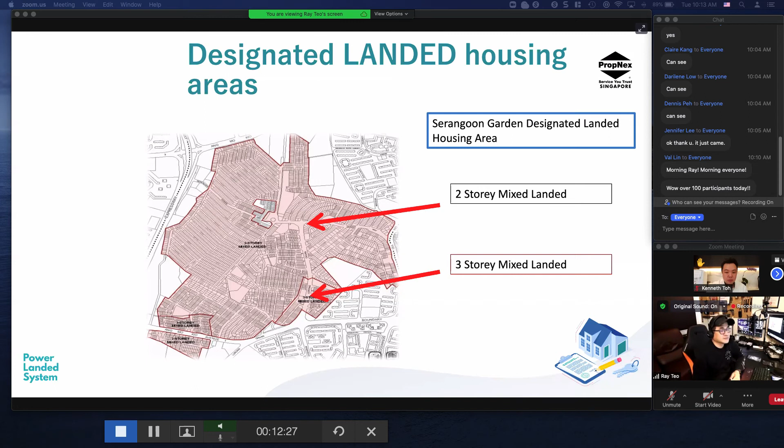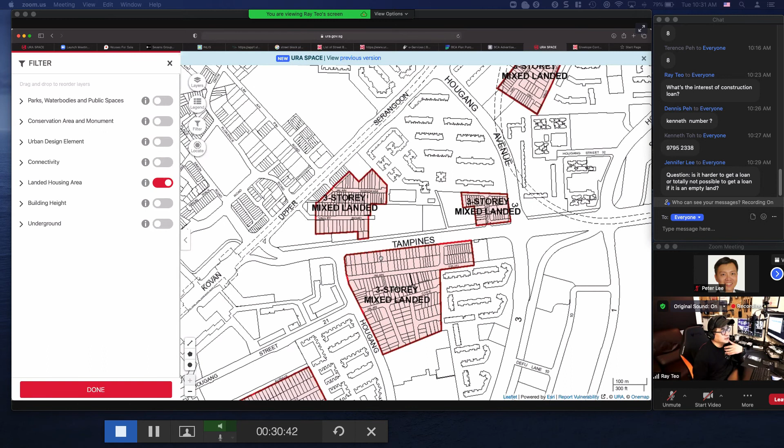In this area, you can build terraces. If you go further down in Serangoon, you'll find bungalow areas, 2-story bungalow areas. Where is this? This is the Lorong Chuan area, Dunsfold. In this area, only bungalows — only detached houses — can be built. But these are not good class bungalows.

These are bungalows, a landed housing area. This is how you use it - you need to do your due diligence to check so there's no misconception. Say your buyer buys land here, thinking it's a big land, good, I can subdivide into semi-D. You say, yeah, I checked already, can. But you never checked the landed housing area map, so your data is misrepresented.

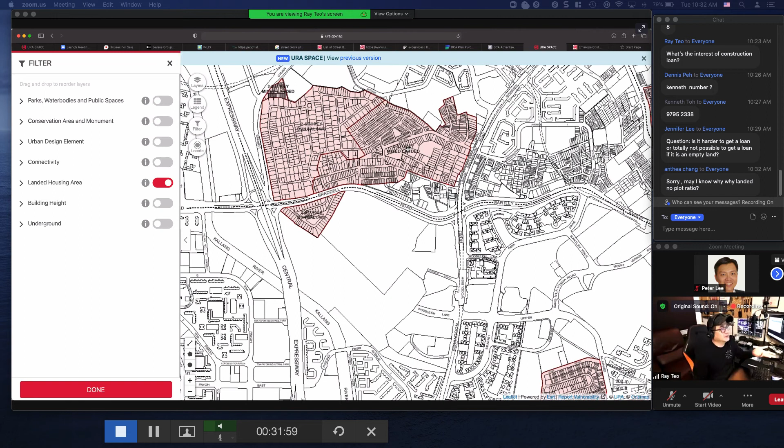May I know why landed has no plot ratio? No, landed housing area has no plot ratio, not landed itself. Landed housing area has no plot ratio because you are not supposed to build apartments. The maximum story you can build is 3-story. For example, here is 2-story only, but the highest you can build in the landed housing area is 3-story. So you cannot build anything above 3-story, no apartments, etc. Therefore, you don't need to put plot ratio.

So if you go down to Telok Kurau, you see Telok Kurau, or Still Road, or Jalan Telok Kurau, Lorong Telok Kurau, Lorong J, Joo Chiat Place - these are all landed. But these are slowly disappearing because this is not a landed housing area. So people are buying the landed here and amalgamating, that means combining the land together to become bigger land to build apartments. So down here you have plot ratio, but down here you don't.

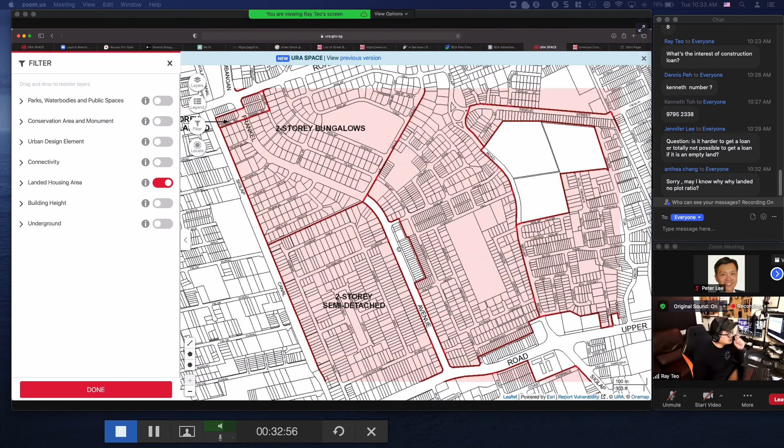So this is the number one thing you really need to check. Okay, so back to the slides.

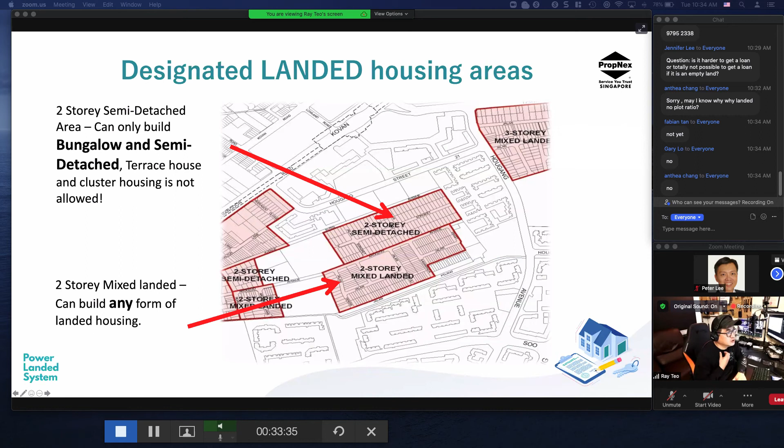Okay, so GCBA areas can also be found inside the landed housing area map. Can you see it now? Type 1 if you can see. Thanks Fabian. So GCB areas can also be found inside the landed housing area map - you can only build GCB there. The minimum land size for subdivision is 1,400 square meters.

People always ask me questions like, does it really mean that a bungalow less than 1,400 square meters but located inside GCBA is not a GCB? The key thing about the definition of GCB, when the government draws out a GCB area, their mentality is this: now you need to follow my subdivision requirement. If you want to subdivide a big land, a huge chunk of land, into smaller units, then every single unit's minimum size must be 1,400 square meters.

How about small land, like this very small land that's already only about 10,000 square feet, but it's already inside GCBA? These are still good class bungalows, just smaller good class bungalows. When we say good class bungalow area, it's actually a development control. Slowly it became a classification to buyers, but mainly when the government draws up a GCBA it's for development control, not as a classification of properties. This is why sometimes you see small landed plots, 10,000 square feet, located inside GCBA.

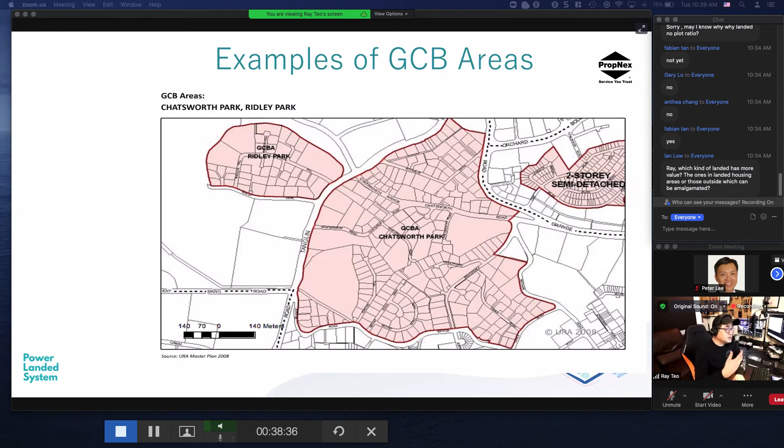There's no real much difference in terms of landed price per square foot in a landed housing area versus a non-landed housing area, if it's nearby. Or if it's a different district, what constitutes the difference in prices is based on location, convenience, and other amenities factors.

So converting, these are the basics of how to convert a postal code number to your postal district. This is because postal districts do have their advantage. Some districts command a higher premium than others. Definitely District 15 will usually command a premium as compared to 16 or 14.

But 14 and 15 depend on the exact location of the unit, so there's a small difference. You also have to take into consideration the Kembangan area in District 14 - most of the landed there is inside Kembangan area instead of Geylang area, because 14 stretches from Geylang all the way to Kembangan. So some of the Lengkong 2, Lengkong 3 landed properties, the price is quite similar to Still Road landed.

Various types of landed properties - good class bungalow, detached, these are all basics. I'm going to go through this very, very fast for you, but although they are basic, you need to remember their development parameters.

So a good class bungalow looks like this, located inside a good class bungalow area, with a minimum land size of 1,400 square meters. This minimum land size is for subdivision purposes - if your land size is 3,000 square meters, the maximum you can divide into is 2 units only, because of the 1,400 square meter minimum.

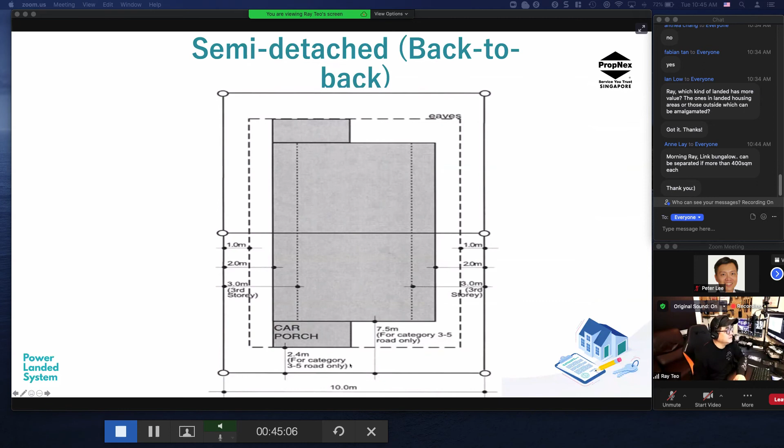When we want to look at land potential - if I have a very big bungalow land inside a semi-D landed area, I can subdivide it into semi-D. But I need to make sure first that the land must be 400 square meters, so I can subdivide into a pair of semi-D, 200 square meters each. On top of that, I need to look at the plot width - the old bungalow land together must have 16 meter plot width, then I can subdivide into a pair of semi-D with 8 meter plot width each. The minimum plot width is 8 meters.

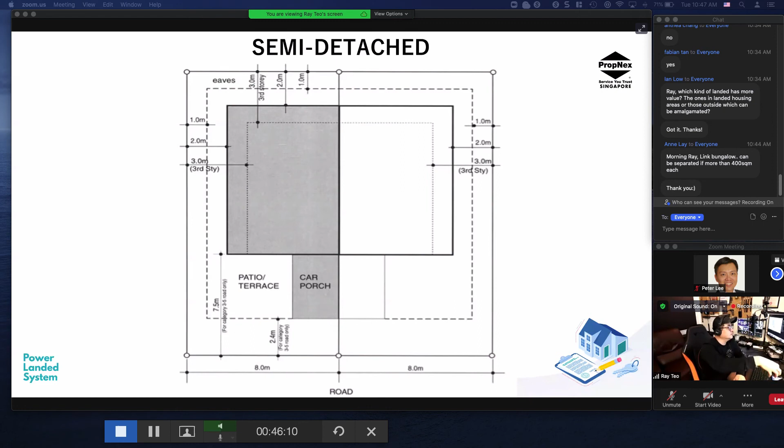Sometimes, if your bungalow's plot width is only 13.5 meters, even though the size qualifies, because the plot width does not qualify, you cannot do subdivision. That bungalow will always remain as a bungalow - cannot subdivide anymore.

So these are some of the issues. Recently we sold a very, very old bungalow land, like East Coast Terrace, to the 7 Group - very, very smart. Eric Ching is the boss, very smart. He managed to apply for subdivision into 2 pairs of semi-D, that means 4 units, plus 1 detached house, from one huge bungalow at 21,000 square feet.

So based on the price, he bought at 18.7 million, right? So the land cost will only cost him about $900 per square foot.

East Coast Terrace is next to Siglap, quite near to Siglap Centre. So there is prime land in East Coast, super prime land in East Coast. I expect the relaunch price per unit to be at least $2,500 per square foot, or even reaching $2,800 per square foot.

When you talk about per square foot in landed, we always talk about per square foot land. Nobody talks about per square foot built-in. People who talk about per square foot built-in are trying to bullshit. But does built-in make it more costly? Usually with bigger built-in, we will always see a more expensive per square foot land.

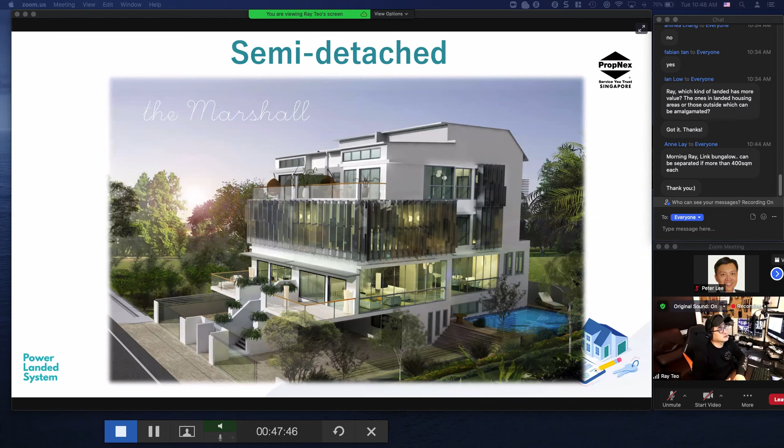Terraces, as long as more than 2 units are attached together, is called a terrace. So 3 units is a terrace, 4 units is a terrace, 5 units is a terrace. Everyone wants to build terrace, why? Terrace earns more money, because you have more built-in, especially inter-terrace.

This corner terrace, the requirement is exactly the same as a semi-D. Corner terrace type 1 is exactly the same as a semi-D. Do take note of this.

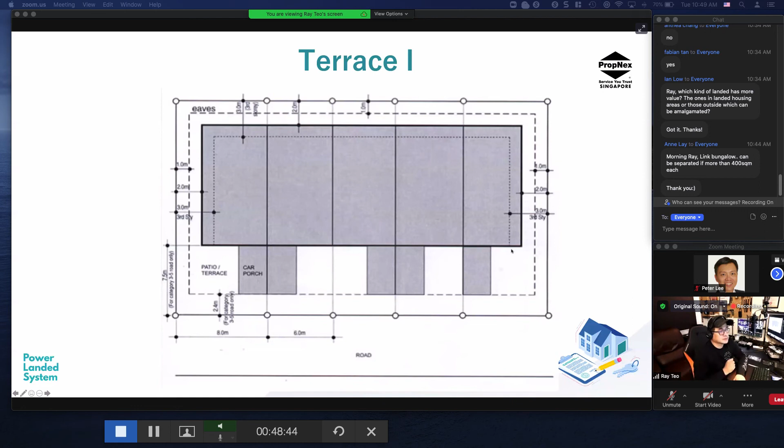This is terrace type 2. This is going extinct, all this type of property is going extinct. I see no car porch. The setback requirement from the boundary line to the building is only 2 meters. It's only type 2. Type 2 terraces nowadays very seldom get granted building permission, very, very, very seldom. For one of the requirements, it must form its own enclave for development to be granted type 2.

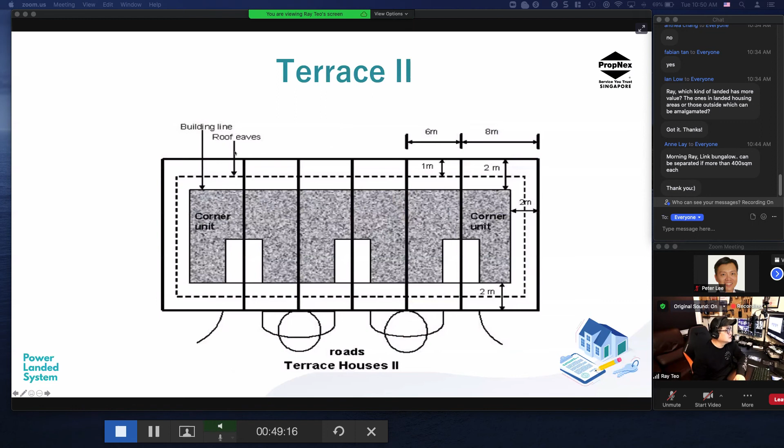Terrace. So this one we'll briefly go through, not important, seldom happens, won't happen anymore. So strata landed: townhouses, cluster houses.

I think I'll leave it to Jeep to explain to you in detail about strata landed. Jeep is the expert in strata landed. So down here, our cluster houses are what? Cluster houses are actually strata title, SSCT. So here there are two types of title in Singapore.

One is SSCT, Subsidiary Strata Certificate of Title. The other one is CT, Certificate of Title. If you are a pure landed owner, you will have a title called CT. If you are a condo owner, your title will be SSCT. Or if you own cluster houses, your title will be SSCT as well, and you will be considered subsidiary proprietor to the units. You do not actually own the land, you share the land.

For cluster houses, some common questions asked by customers will be, how much is my footprint? What does this sentence mean? These are for more educated buyers. Footprint means how much land your unit is particularly sitting on. It has no legal meaning whatsoever, because your share value is not determined by your footprint. Your share value is determined by your built-in inside the cluster houses.

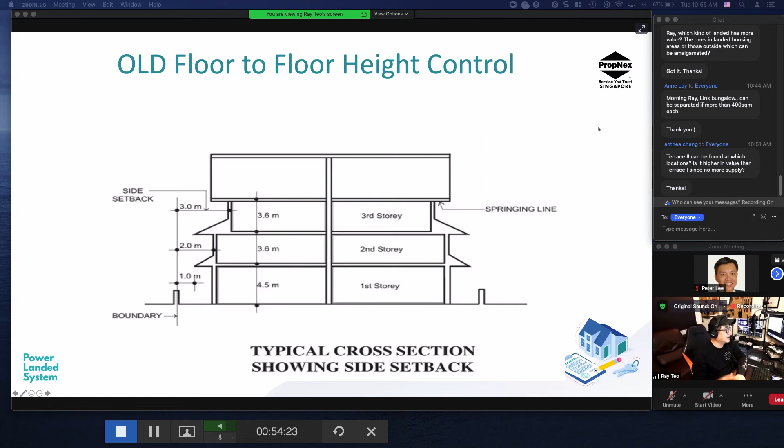This was the old rule, so some of the resale units you'll be selling will still be following this old rule. But the new rule is different. I'm going to skip the old rules and come to the new rule. The new rule makes modern landed properties now very pleasing to the eye. The designs are better nowadays because of the new rule. We call this the envelope control.

So in a two-story landed housing area, you build up to 12 meter height, 8.5 meter main body then 3.5 meter attic. This allows, in a two-story area, when you go into the house, you feel like it's 3-4 stories. Later, I'll explain the concept of mezzanine floor. So this is a two-story area, you build up to 12 meters, or 8.5 plus 3.5. In a three-story area, you build up to 15.5 meters.

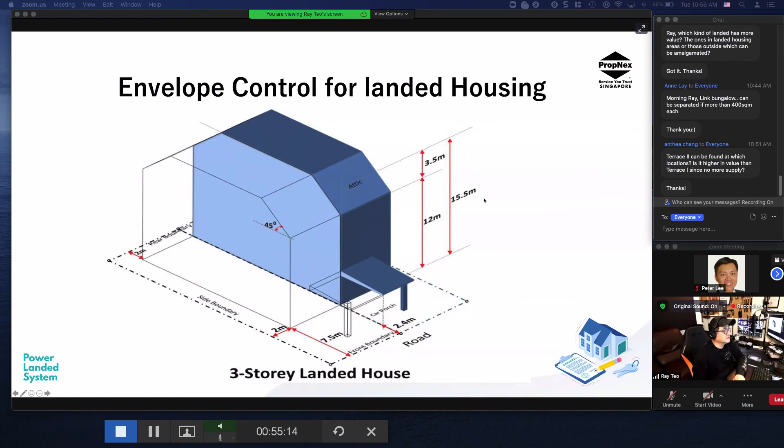So what about outside landed housing areas? You follow the 3-story rule. Remember, landed outside a landed housing area, you can still use this envelope control, up to 3-story. It doesn't mean that if outside the landed housing area has plot ratio 1.4, you can build a 5-story landed property. Not allowed. Maximum stories for landed properties is 3-story. But when we say 3-story, we are referring to this envelope control, 3-story, which is 15.5 meters in total height, measured from the road level.

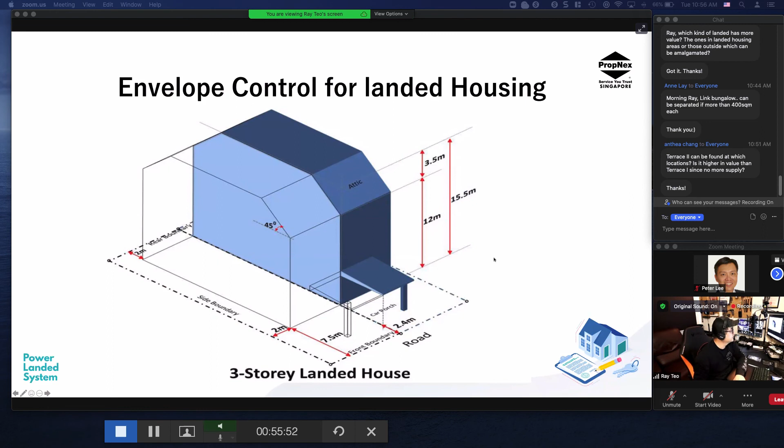Now I'm going to show you what envelope control means. This ceiling to floor is actually 1-story only. Then when you see something like this, this actually is not the 2nd story, this is a mezzanine floor. So in a 2-story area, you will see at least what looks like 1, 2, 3 stories, or even 4 stories plus the attic. So now the envelope control creates what we call a sub-level.

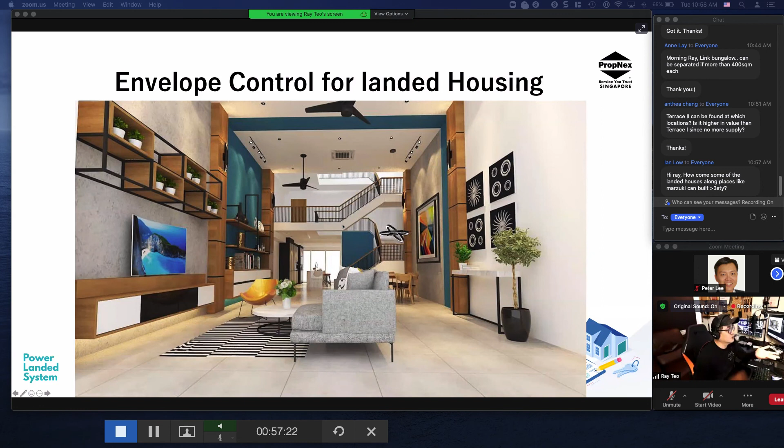How come some of the landed houses along places like Marzuki can build more than 3-story? When you say more than 3-story, that's from your point of view, not the legal point of view. The legal point of view only cares about how many meters. So here, as I was trying to explain, this is 1-story, but within this 1-story you find another sub-story. So to you this is level 1, level 2, level 3, but actually from the development criteria, this is still 1-story. We call it a mezzanine floor. This is not in your notes, I just added this in this morning. If you want, you can do a screenshot of this.

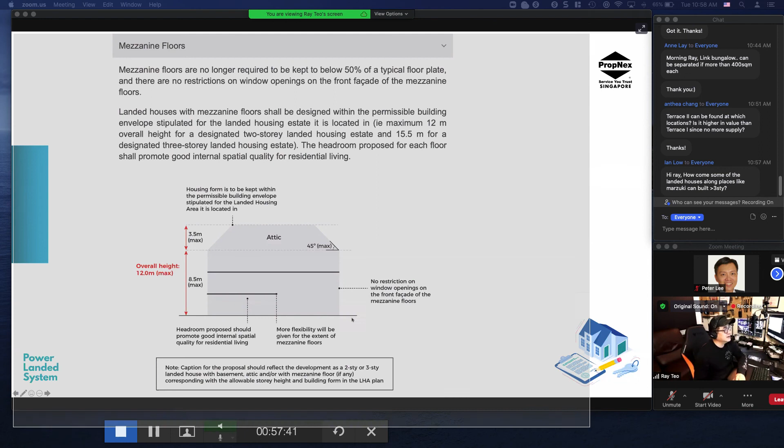Okay, because I want to put this in so that I can explain to you. So this is a 2-story area, 8.5 plus 3.5. Can you see? But from when you walk in, you'll feel like, hey, this is 1st story, but you feel like this is level 1, level 2, level 3 plus attic, level 4.

Or like to the olden market agent, last time, old marketing agent, never study this one. Okay, everything 3.5-story, 2.5-story. 2.5-story is what? 2.5-story is 2-story plus attic. But now still using 2.5-story means that you never improve.

Okay, now it's envelope control. We don't use the word 2.5-story anymore. We don't use the word 3.5-story anymore. It's all very misleading. So in this case, you see, this is a 2-story area, 12 meter.

But can you see internally, it looks like what? Level 1, level 2, level 3. Then if you have a staircase up to an attic, level 4. So from here, it looks like 3.5-story.

So do you understand what I'm trying to explain to you about mezzanine floor? You understand type 1? Okay, so that I know all of you are getting it. So you have become professional already. All the description coming out from your mouth right now is professional. Don't use the word 2.5-story anymore. Don't use the word 3.5-story unless you're selling a resale where it's still on the old design.

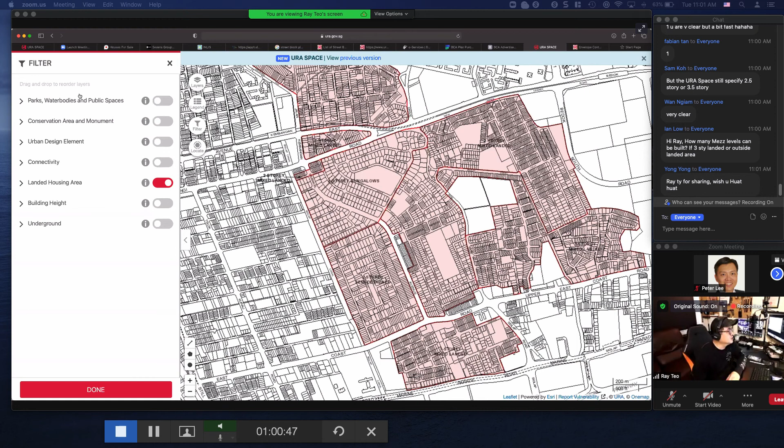Okay, so I'm going to stop sharing here and show you other things. And now practical - I'm not sure, because usually I'm the first trainer. I'm not sure whether the other trainer has shared this. So it is difficult, but I still want to make sure that it's covered.

Okay, so here, take down this website: wahkhiaw.com.sg. Did anyone share this with you already? This website, wahkhiaw, wahkhiaw.com.sg - have any previous trainer shared it with you already? Okay, why am I sharing this website with you? Free listing, free listing, not only free listing, you won't get into trouble for advertising there. You cannot see me? Can you see this website? Dennis cannot see.

Okay, so here, these are all the developers, right? This developer gives authorization to all agents to market their property on Guru or whatever website you can use. Okay, so you can download the photos. You can download - like if you want to have a Sentosa bungalow, okay, for sale, number 77 Ocean Drive, okay, you want to see, you want to advertise, they'll show you the photo. All the photos are here.

Okay, you can download the photo and put it on Guru to advertise. Or, okay, you can see the notes for agents, right? Notes to agents, okay, marketing, I'll show you - consent to market, you see? You shall not advertise the sales and rental price lower than what is stated in our listing. This is the rules, this is the rules. Okay, this is wahkhiaw.com.sg.

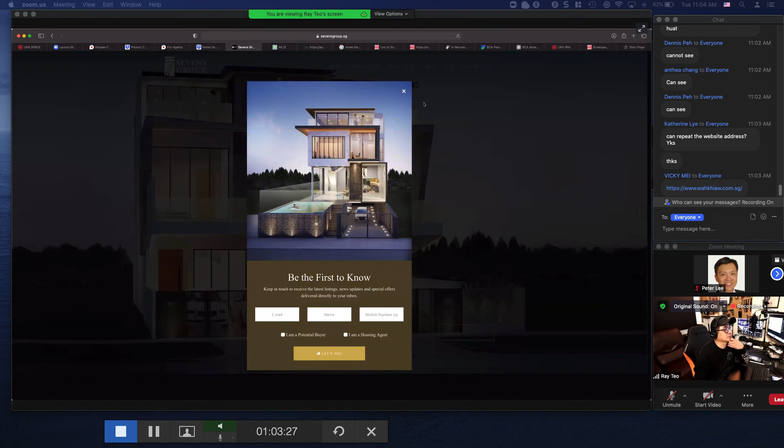Okay, another free website for you: Sevens Group. Let me show you. View listing... okay, so they have this. This unit is sold already, Jalan Arnap number 12 sold. A few weeks ago it was still available. So you see, their units can sell.

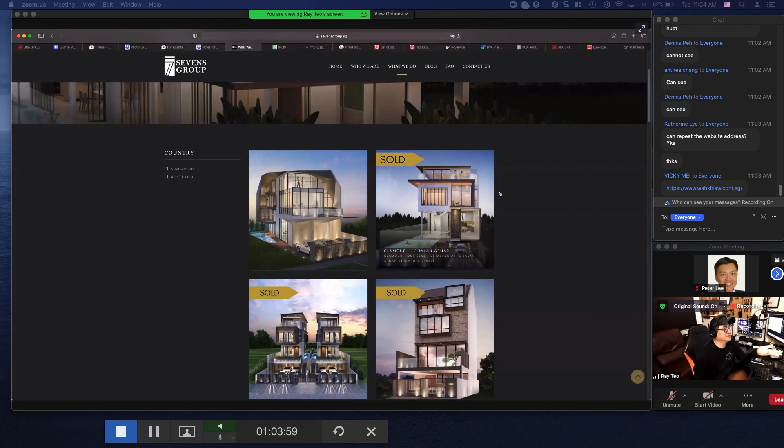Now number 5 Lengkok Merak. You see number 5 Lengkok Merak is here, location, and you can download their e-brochure. Location, the unit, all this you can advertise, and go directly to them.

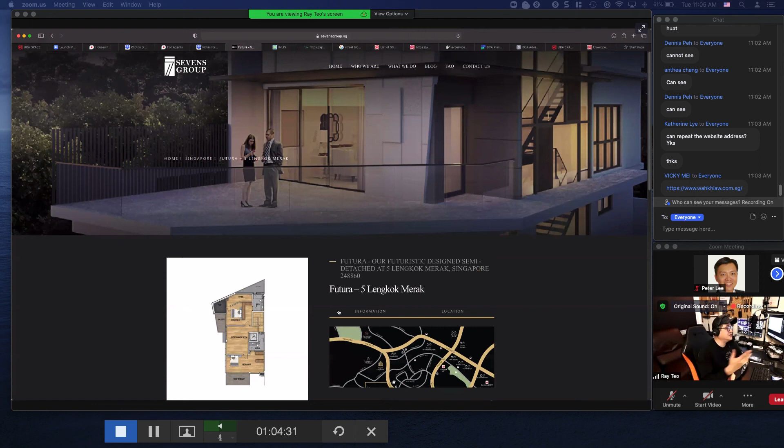So you see, today I'm being very selfless. We give you some tips on free listing for all. All these can earn you money, and it's free. See, how is it hard to get this? I'll show you another example to debunk the idea that it's hard.

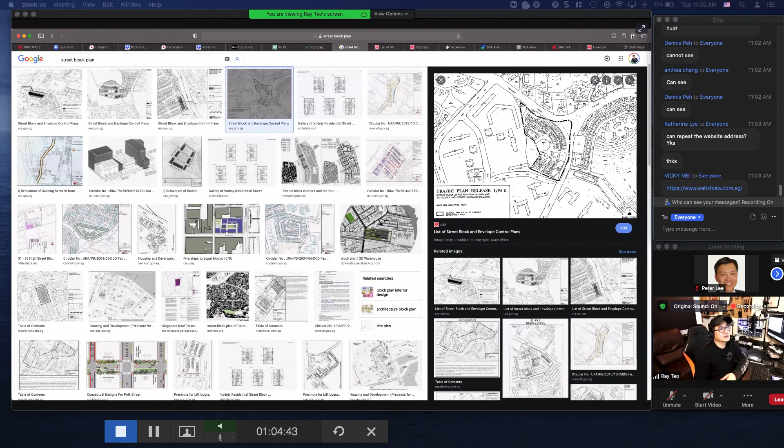Let me see... Google Map, I'll show you. Google Map also can get free listing, from developer owner. Developer is owner, developer is owner.

So free listing, I just gave you 2 websites where you can find free listings. One is Wahkhiaw - you can download from their Dropbox and straight away advertise, and they allow you to do that. Let me drop a pin and show you - I'm not sure if this unit is sold already, but one day, this unit, 111 Secret Road, was a super open listing.

I saw like hundreds of agents marketing it. I was wondering how come so many agents are marketing this. I looked at Property Guru and realized the owner's phone number is right there - a $12 million property on Secret Road for sale.

So this is one way. Another way - I'm going to share something scary for you. For example, let's go to Property Guru first.

Property Guru. Should I share this? Never mind, I think I have no time to share this - I have a lot of other things to cover besides this. Let me go back down to my slides. Are you all getting what I'm trying to teach here? I'm going very fast because there isn't enough time to download all my knowledge.

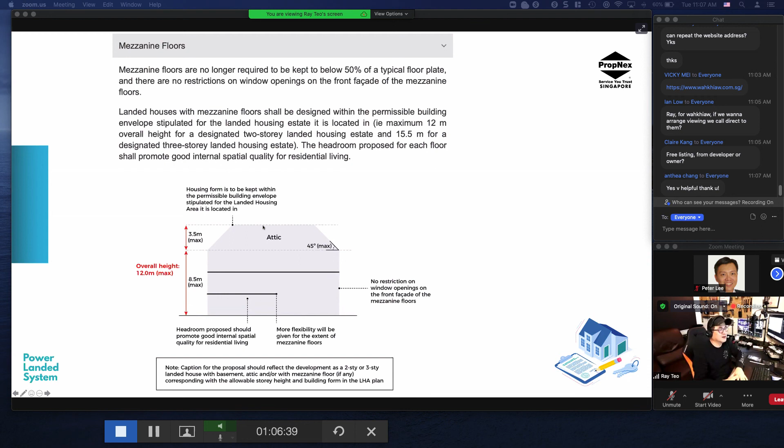So, A&A works - what is A&A work? When you hear the word A&A, what does it mean? It means you apply for construction work that leads to less than 50% increase in GFA, and there's no additional floor added. If it's more than 50%, or you add an additional floor, then it's not called A&A works - it's called reconstruction. Why do you need to differentiate A&A from reconstruction? Because they require different permits, but you just need to know this - you're not the one applying for the permits.

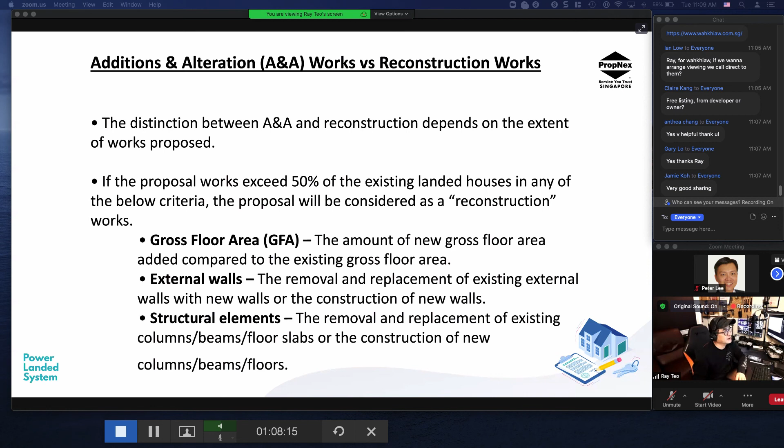I do come across cases like this. Recently one of my students asked me about a case where the owner, after moving in, now wants to sell the property, but it hasn't received TOP. Why no TOP, when the owner already moved in? The owner moved in illegally, maybe due to some quarrel with the contractor, and in the end never submitted for TOP, or was rejected, and just left it. So now there are problems selling because of the TOP issue. Sometimes you need to check whether the property already has TOP - ask the owner to confirm, especially if it looks very new, like 1 year old.

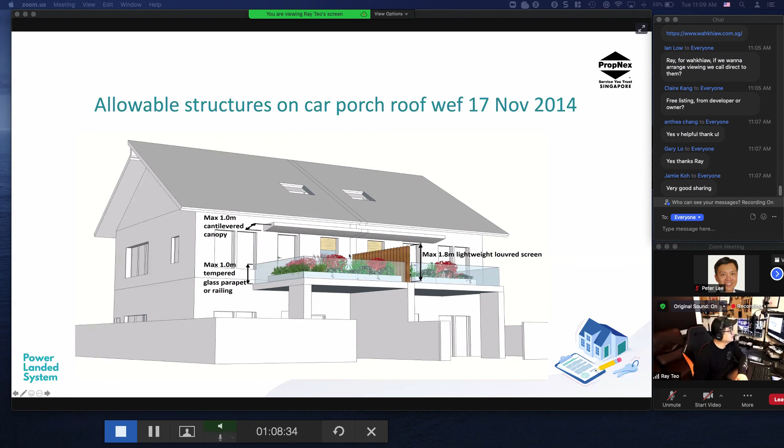Envelope control, finished - allowable structure on car porch. Now on top of the car porch, you can build a balcony. Previously, before 2014, on top of the car porch you couldn't build anything, but now you can build a balcony. However, you cannot build this.

So to buy landed, when we deal with buyers and sellers of landed, you cannot be the kind of HDB agent. An HDB agent converting to landed agent sometimes is not used to the environment they are going to convert into. Landed properties have a lot of unapproved structures, a lot - so it's a risk to buyer. If the buyer is an HDB upgrader, they're like, wow, very law-abiding. You need to educate them.

When you buy landed, you buy as-is where-is. If you request too much from the owner, saying I want you to reinstate it back before I buy, in this market you will miss every unit. No owner will do it for you. You say you don't want to buy, don't buy - I won't do anything for the buyer. So these are some of the things.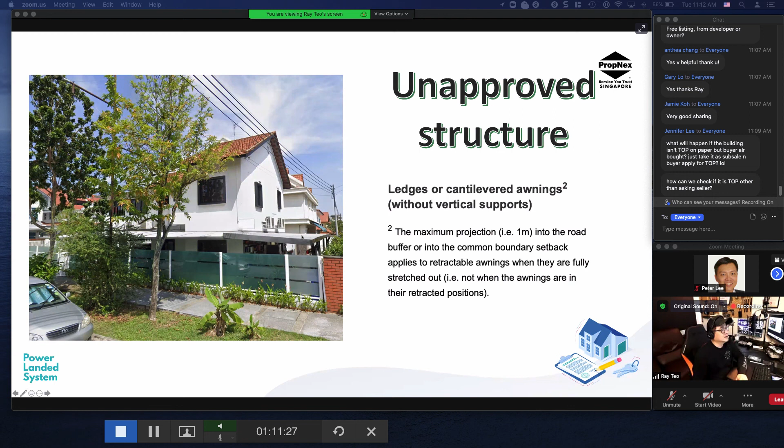We're supposed to have a break before we go into subdivision, but before the break I still have 15 minutes, so what is the advice for buyers to buy landed under construction from developers?

Let me tell you an ultimate truth you might not want to hear: it's very risky for a buyer to buy landed under construction from small-time developers. The risk is this - especially in turmoil time, like during the COVID period, labor cost increase, construction cost increase. So let's say the builder is not able to deliver, then you're in a fix. Although you can sue, the person may already be bankrupt. So it's dangerous, unless you buy from very established developers.

For small-time developers building 1-2 units, there are risks, which is why landed properties over the years are usually sold nearer to completion - that means the building is finished already, you can see it, flooring all in already, then there's some relative confidence for the buyer to buy. But now it's different - Singaporeans sometimes forget the risk in the frenzy to buy because landed price keeps increasing.

So some buyers are not careful - they will buy before the project goes TOP, because if they don't, some other buyer will buy. So the current situation is there are people who buy before TOP while it's under construction, but they run the risk. There is a substantial amount of risk, especially if the developer is unheard of before, like a very small portfolio, only 2-3 units, and now only building 1 unit - there's a huge chance he cannot deliver. Well, I shouldn't say huge chance, not everyone, but I always assume the worst - there's risk involved.